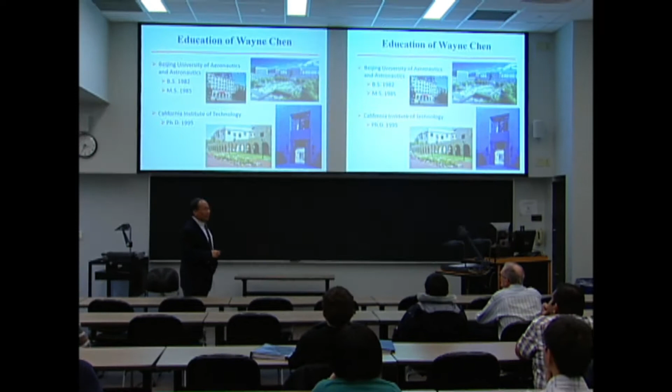All my degrees are in aeronautics. Earlier, over 30 years ago, I got my bachelor's from Beihang University. It used to look like this, and nowadays it looks like this. This is where I got my undergrad degree, and I'm actually running lab classes next semester here. When I was doing my undergrad 35 years ago there, the lab equipment was actually more than we have here now—kind of an interesting contrast.

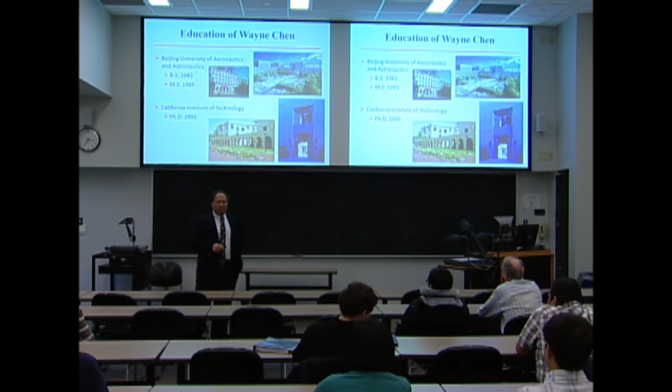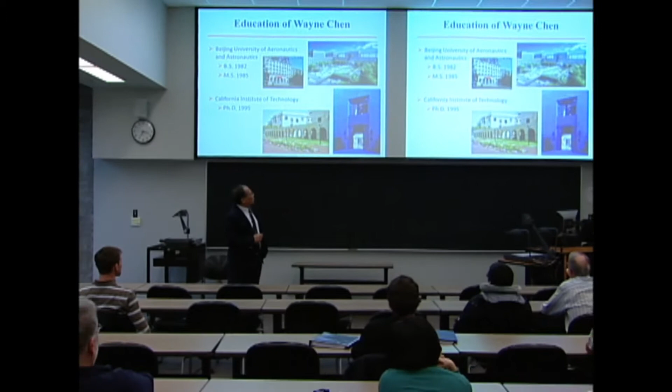Then I went to get my PhD. Of course, Caltech is nothing changed—it's the same old Caltech. And if you talk about equipment, what equipment? If you need something, you build your own. That's where I got my last degree, in '95. When I got into Beihang, that was the top ranking aero university in China, and I think it still is today. When I got my PhD, Caltech's aeronautics was the #1 ranked program in the country, and I think it's back to that spot now.

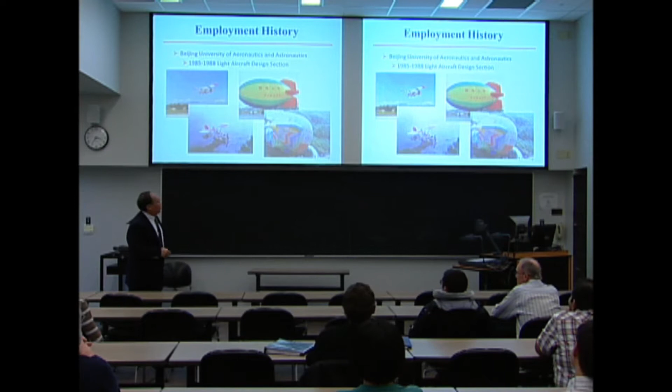Well, there was a gap—I don't think I'm that dumb, but it took me 10 years to get my PhD. I took some time off to have some fun. I spent 3 years designing small aircraft, building them, and flying them. I got pretty good at building these airships—pretty good at tailoring too. If you have a sewing machine, you sew 2 pieces of cloth for 100 feet long, and if you don't do it carefully, by the end one piece can be 5 feet longer than the other.

We used this vehicle basically to pull the electrical line from the first ever Yangtze River Dam to the area the electricity needed to go to, through very tortuous mountains—we got lines through by air. So we did some real work.

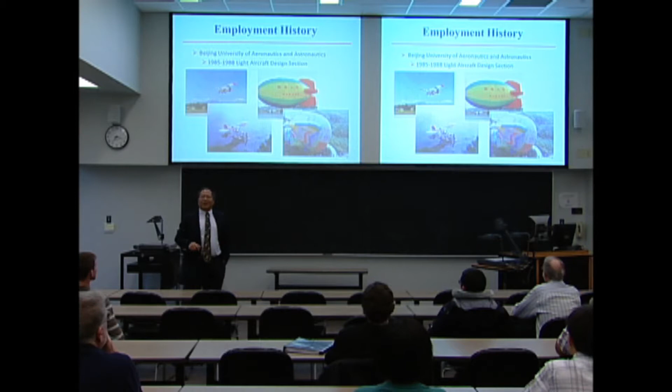But after a while I thought, well, these are too small—airplanes I built were just a bit bigger than model airplanes. I wanted to build something bigger. So that's my next phase.

I was part of a jumbo jet airplane design team of 7,000 engineers. It turned out not to be as much fun as I expected—you get confined to a very small area. But I was by the runway when this airplane took off for the first time, and it was a very exciting, satisfying moment as an aerospace engineer. But after that, it started getting boring.

So I asked to transfer to the R&D department—they said, you're just a production line engineer.

You probably need to show an advanced degree from this country. I said, okay, I'm still young, I'll show you one. So that's when I got back to grad school and got my PhD from Caltech.

The problem is, while I was at Caltech, the company became Boeing, and the R&D department is just completely gone. It's just a department in Cal State Long Beach now. So now I cannot do that.

Then you go teach. So I got a job at the University of Arizona. This is where I started my teaching career. It's a spectacular place, very beautiful. So I figured I'll be retiring there. But then obviously I'm here, I'll tell you why.

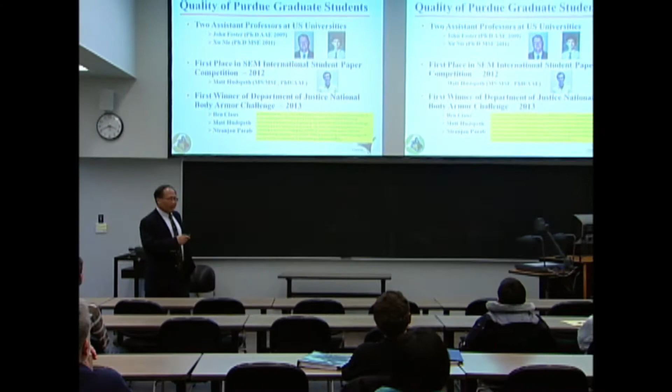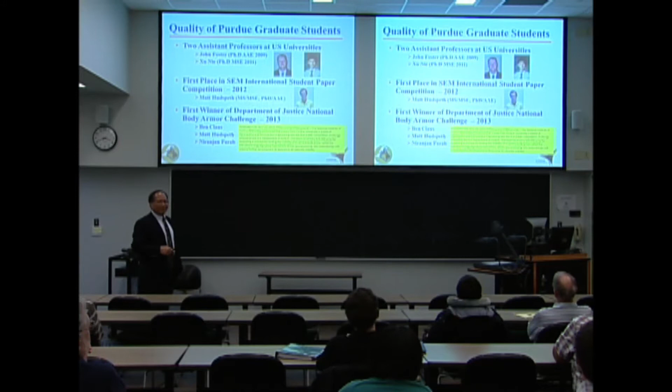So this is my first batch of students. I came here in January 2005. There are two assistant professors here, one's actually visiting me right now.

Yeah, I think this guy has trouble spending his money. He's been an assistant professor for 2 years and got over $2 million, so he's now bumping his head on the wall.

And the next younger ones are growing up. This one got first place in the international student paper competition last year in an SEM competition.

And this actually just made national news a few days ago. The National Department of Justice called for a national challenge on police body armor evaluation, open to everyone—national labs, industry, research institutes. Eventually, my students beat out everyone to win the final contest. That was just announced.

So it is a very satisfying experience when you have an opportunity to work with the hardest working people that are also the brightest—they're very creative.

And of course, second, the factor is we have a group of outstanding colleagues. Almost anything you want, any question about anything in engineering, you can find someone to talk to. And it's easy to work with people. I work with colleagues I've never met, write giant proposals, and get funded.

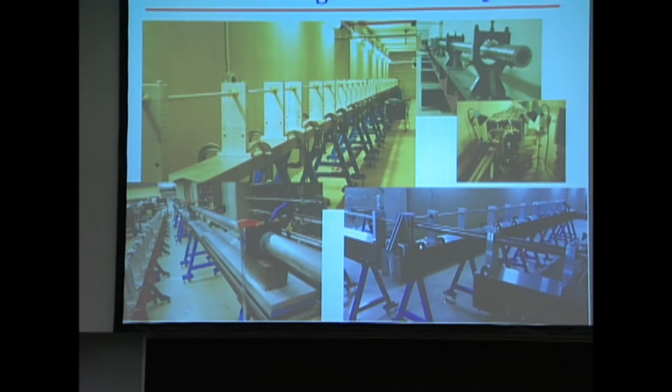Another main issue that I left Arizona is I pretty much grew out of capacity, my lab was way overcrowded. At that time, Purdue was expanding their lab spaces. This is the basement of Bowen Lab, and it's a perfect place. You can make big noise without getting noticed, so you can build big guns and actually play down there.

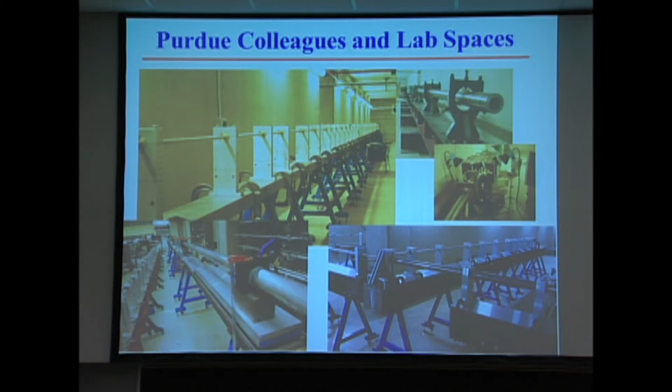I actually told my students in undergrad class, when I was teaching structural analysis, your professor, when he's this tall, he likes two things, guns and airplanes. So as a little boy, what would you expect? Now the professor's over 50 years old, I'm teaching you guys airplane design, and playing with bigger and bigger guns. Look at the size, a rifle looks like a toy inside there.

So it's a lot more fun and you get paid. It's a career that you really cannot complain about. It's so nice.

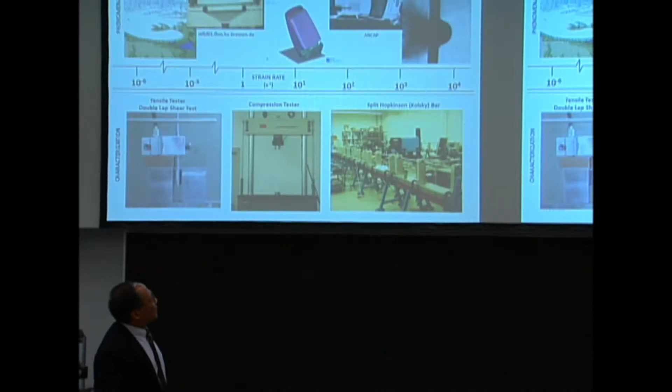So what do we do with all these tools? I have good toys with smart people. Now we need to do some scientific work. The area I'm working in, this is an axis that tells you how fast things are deforming. Most of the properties you find from books are in this region.

Once material deforms faster at a higher rate, you don't get the properties in the books. So that's actually my lifeline. We characterize impact response of materials at high rates.

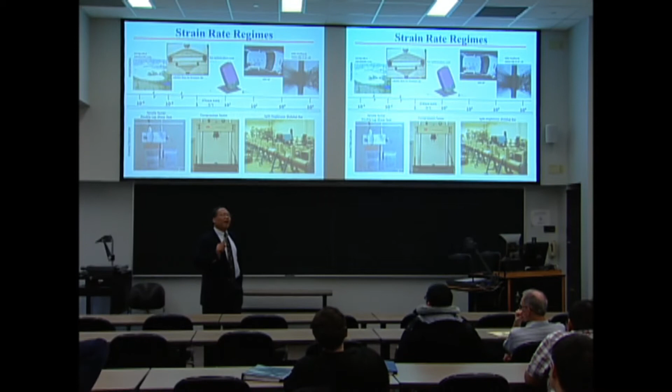Sometimes we do obvious impact, sometimes it's not that obvious, like a cell phone drop. I once characterized the shock isolating material for a cell phone company, and that was over 10 or 15 years ago probably. Later I noticed the cell phone company made their advertisement: other people's cell phone dropped on a concrete floor, the cell phone shatters. Their cell phone dropped on the concrete floor, the concrete shatters. I know what that capacity is.

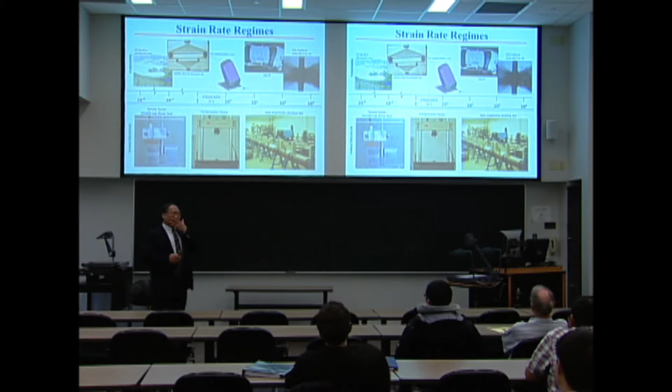So this is the area I basically work in, with people with applications in impact situations, ballistic impact, or crash or drop situations.

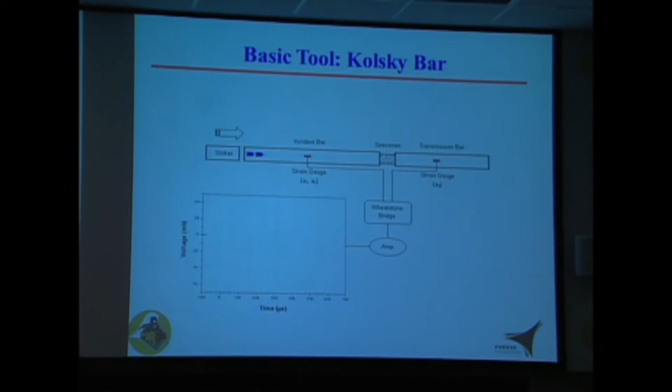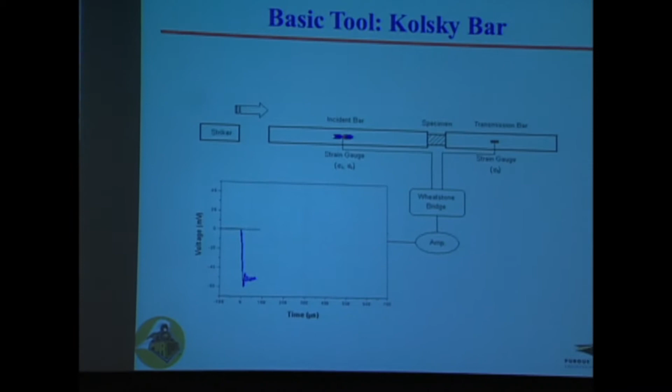How do we work on this? This is my basic tool. I want to deform the specimen, a sample, at least at hammer blowing rates. You can break a piece of material just with a hammer, you put it on the table, you break it, it's not a big issue. The issue is we're a scientific lab, we need to make things quantitative. So how do you make things quantitative?

What we do is we put an elastic rod in front of the sample and an elastic rod behind the sample, so the hammer will hit the sample through the rod. You generate elastic stress waves that load the sample. Some of the wave will reflect back, some of the wave will go through.

This is the same phenomena as if you stand by a pond and throw a piece of rock in the pond, there will be a wave propagating to your feet. If you throw a bigger piece of rock, the wave is higher. So the wave carries the information about some event occurring from a distance.

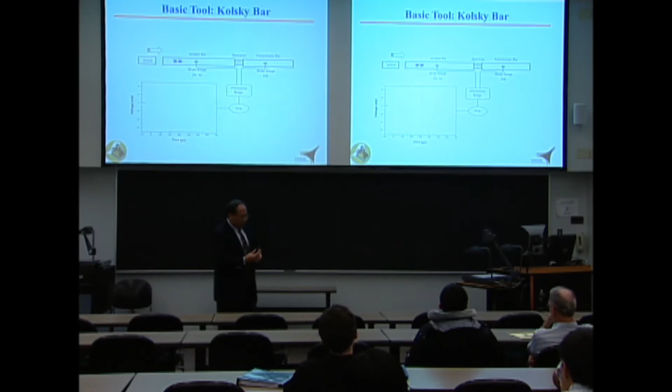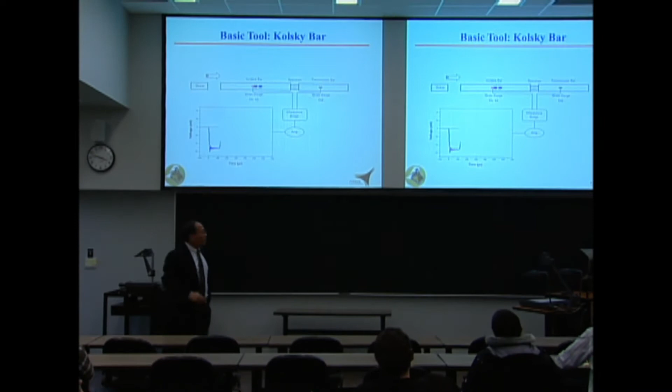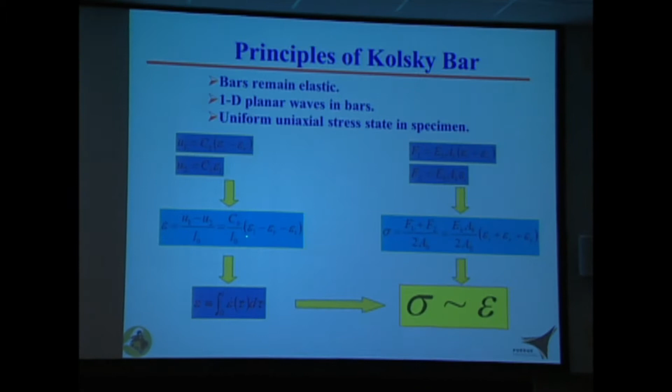This is actually a class I teach at the graduate level, how you analyze these waves using this phenomena. By these tools, now we can make things quantitative. I can measure the strains on the surface of the rod associated with the wave coming in, called incident, reflected back, called reflected waves, and transmitted, the wave that goes to the other side. With these three pieces of information I measure in the lab, I can find the stress-strain curve of the sample I'm hitting. So now it's still hammer blowing rates, but I get quantitative information out.

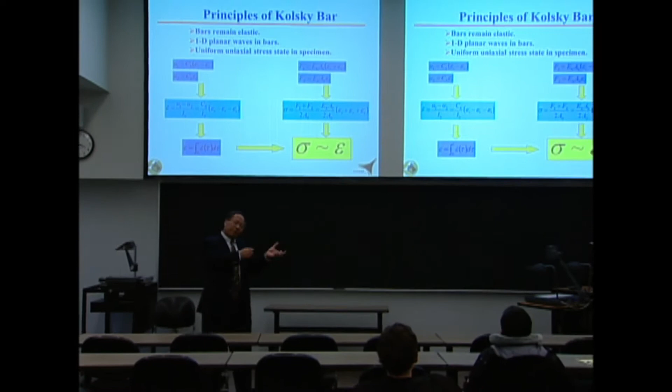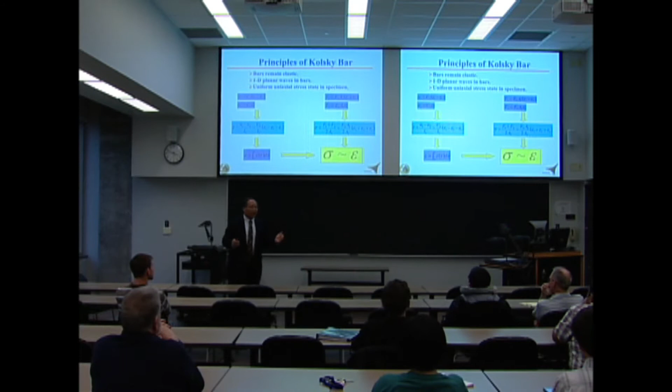So you hit it different ways, you get a family of these curves that numerical people can use to embed as models into their codes to simulate structure response. That's pretty much the path where we fit in.

With that principle, we have quite a few different bars, and in the lab they look very different. This is a very small one - we actually used to pull 3 micrometer diameter spider silk, trying to see how that breaks.

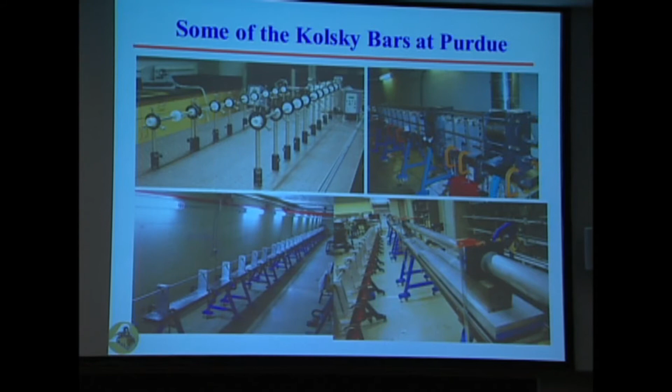There's a lot of things you can learn from spiders, they've been around for 400 million years. This was actually a paper where my student got first place in the student paper competition.

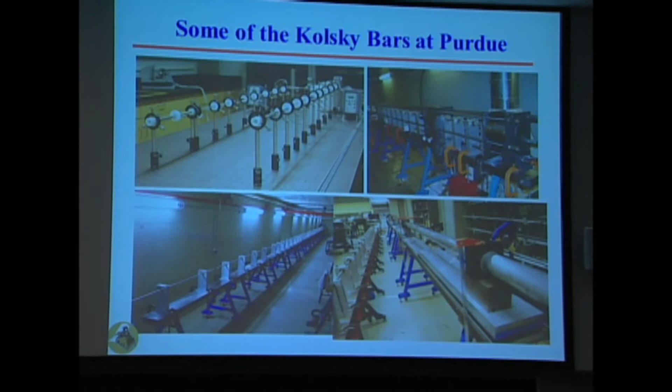We also have bigger ones that we use to characterize high strength concrete - if you want to make a building blast resistant, we characterize those materials. We have a bar that can apply pressure on the sample equivalent to 10 miles underground, a very high pressure, and then you can do axial impact. Or you can have a very long bar - this is probably the longest in this country, at least.

The issue with these devices is that everybody understands the principles, but there's no standard that guides how to conduct these experiments, because these are not trivial experiments. That's where I spent my first 15 years or so of my career, trying to ensure that this material deformed under the conditions we wanted, and that we could explain it clearly.

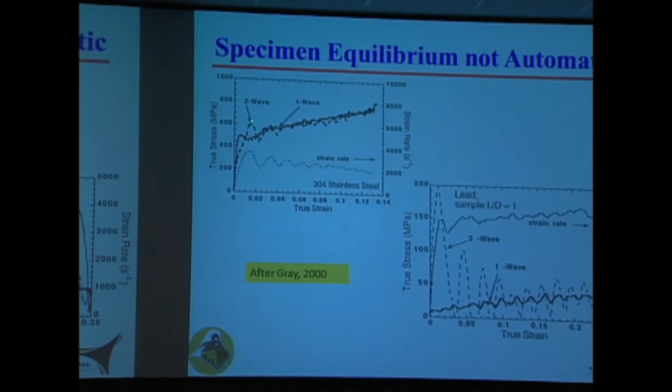Here's an example. I was measuring stress strain curves. If I have a piece of stainless steel, you plot basically the load deformation history. My sample has two ends. Once the front gets hit, the back end transmits load out. If I measure the force from the front end versus the back end - called 2-wave and 1-wave - you see they reasonably overlap each other. So the load in the sample is reasonably evenly distributed, front end and back end very similar.

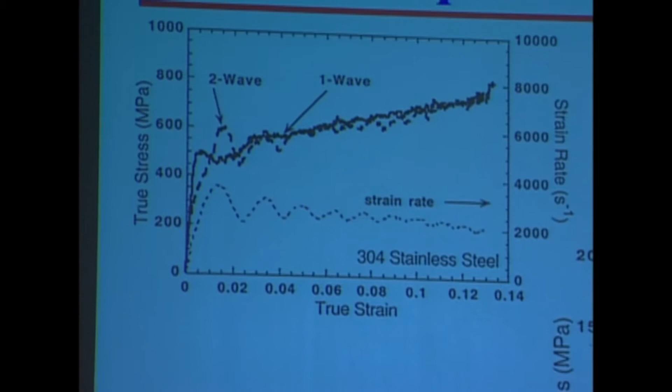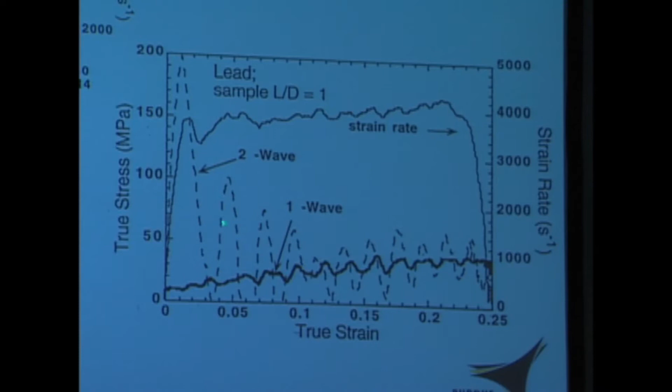If I change the sample into lead, still metal, this would be the curve from the back end load history, the dark one, and this would be the stress strain curve from the front end load history. Now we're going to run into problems - how are you going to explain this to your sponsor, that the two ends are so different? This isn't as challenging because lead is still much harder than the material I'll show you later. With much, much softer material, things get much more challenging.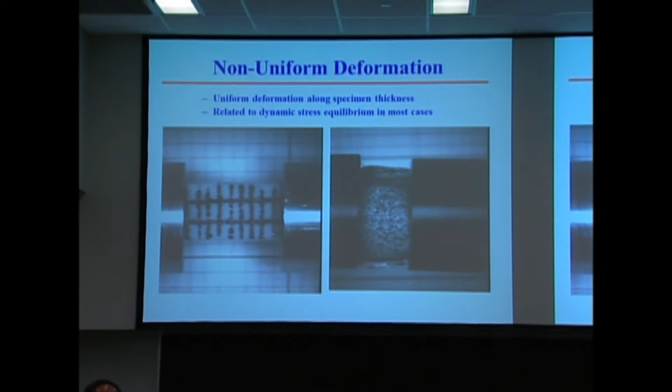So I'm measuring stress strain curves. The stress may be wrong if your sample is not as hard. And if you look at strain, if a sample is soft, do I talk about strain here or here? They're quite different. So for soft materials, if we don't pay enough attention to what we're doing, you mess up the load measurement, mess up the deformation measurement, and you don't get anything valid.

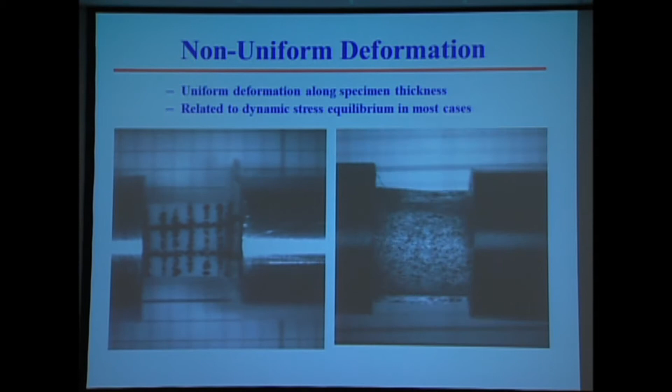So what do you do? You need to look back at the tools we have. We have two skinny rods that sandwich the sample. These rods are much less stiff compared to your static material testing machine, so the sample's response to loading is an integral part of the experimental design. In a static machine, you set it, put in rubber or glass, and the machine runs the same way - it has its own closed loop control system. In the high rate impact machine, you hit the same way, but if you hit a piece of rubber versus a piece of glass, you don't expect the sample to deform the same way. So the experiment needs to be designed very carefully.

You have to control the way you hit it. I don't have many things to control, it's only two rods, so it's about how you hit it. You have to push the material, initially at rest - this is common for all dynamic experiments. The sample is initially at rest, then you want to deform it at high rate, so you have an acceleration process. The whole trick is how do you control the acceleration? You push the material in a way that it gets high speed deformation before any failure occurs.

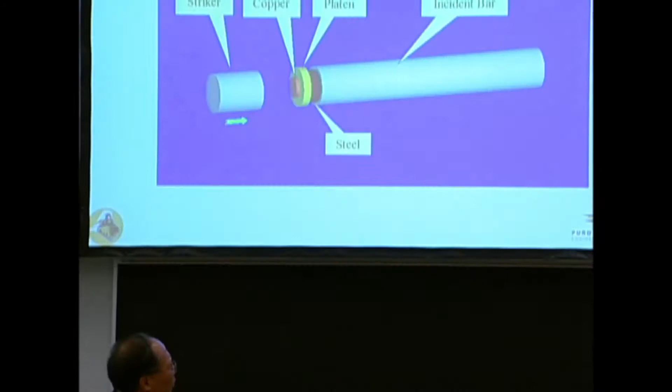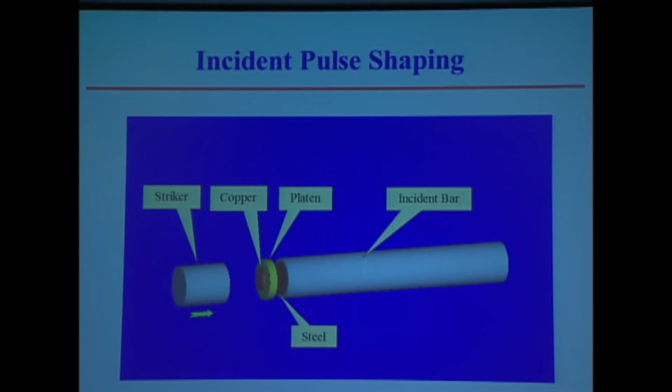So what we do is called pulse shaping. We put - this is the hammer, and this is the rod in front of the sample - instead of direct impact, where all the momentum from the rod transmits into the incident bar, we put some momentum faucet, little deformable materials, so not all the momentum gets in there. You control the way it gets in, controlling how you hit the sample.

Of course, you need to get things quantitative, but that's a lot of work for graduate students. So you figure this out and make it into the program. We can show that we can predict what the real response would be. So I can work out how to load the sample and make the pulse shaper in the computer before sending it to the machine shop - which would otherwise make you wait two months for any piece. This is a very effective tool.

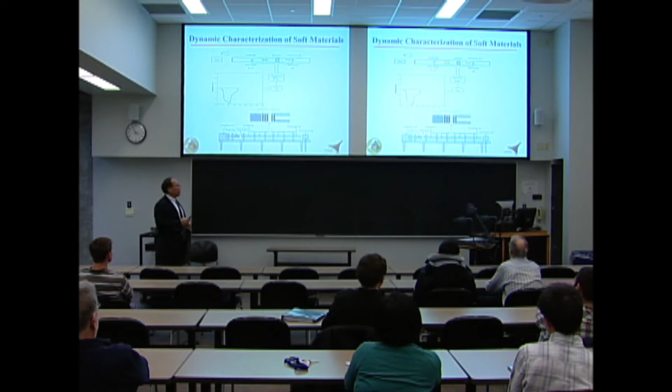Once we have this quantitatively set up, we can do the experiment. The impact loading history will be very different, but that would take an expert in impact mechanics to understand why this is very good. We also verify whether the two sides of the sample have the same loading history, and we have a high-speed camera to show that the samples indeed deform uniformly. So this is one example.

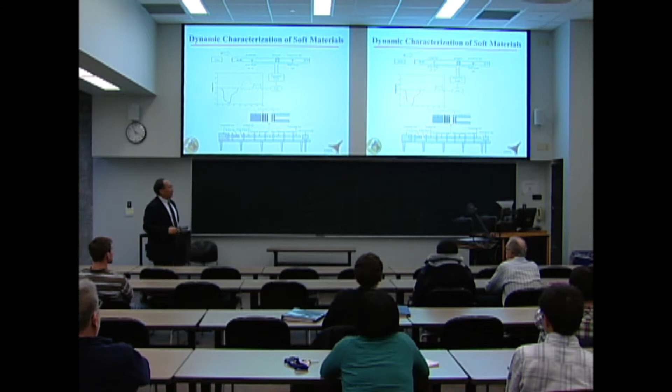If you have a soft sample, you need to take a series of measures to make sure you obtain a valid result. On the other hand, if a sample is brittle, you have other problems - the sample breaks very early. So you need to develop many other techniques.

For the soft part, we applied the techniques we developed and actually worked on the soldier protection program. If you design body armor and use a computer to evaluate the effectiveness of armor, you need to know the material behind the armor, how it responds to impact. So it's everything you can do - from muscles to lungs, liver, kidney, skin. We did lots of these, including tendon.

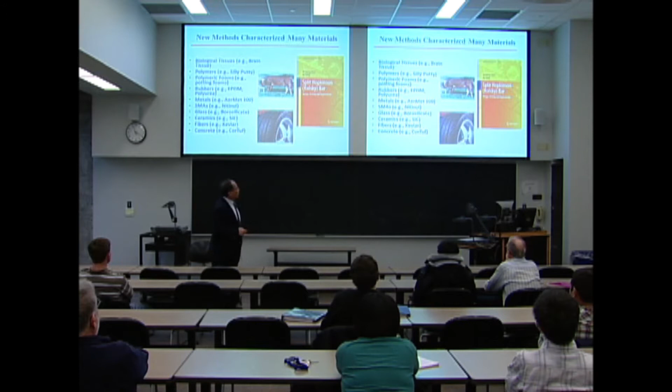And even more challenging, this is for the traumatic brain injury issue. So we characterize the brain tissues, and we did a lot more. As I mentioned, this is a summary of more than the past 7 years.

So we did quite a bit more, and we also become fairly well known in the field. I actually taught a short course at the society annual meeting, showing people how to do experiments on different materials. Then we got a lot of questions: how do you do this?

Eventually, we published a book summarizing the different methodologies we use to characterize different materials. And this is still the only book in the field. If you go to an impact mechanics lab, there's a good chance you'll find this book there. It's fairly well accepted.

So this effort is still moving on. We have different requests to characterize very challenging materials. But on the other side, my interest is getting into a different area. I'm also a materials professor, right?

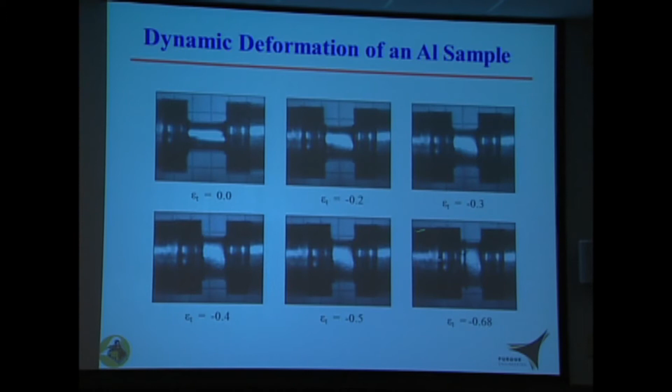I was requested by a group that does very high deformation analysis. They want the sample to deform to very high strain without barreling. So you see this sample starts with a flat surface, and even at very, very high strains the edge remains straight — it never barrels. This is actually a nice piece of work, but this is what we want to learn from the surface.

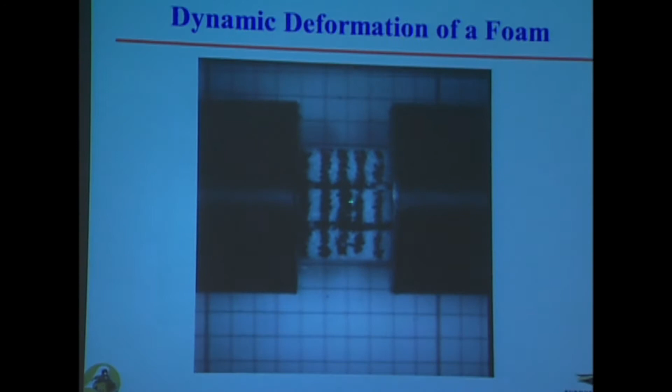But in some other situations, you want to see what's inside. This is a foam experiment, and you see dust comes out, and you want to see what actually happened inside. This is a tank armor ceramic — probably the third hardest material in the world behind diamond.

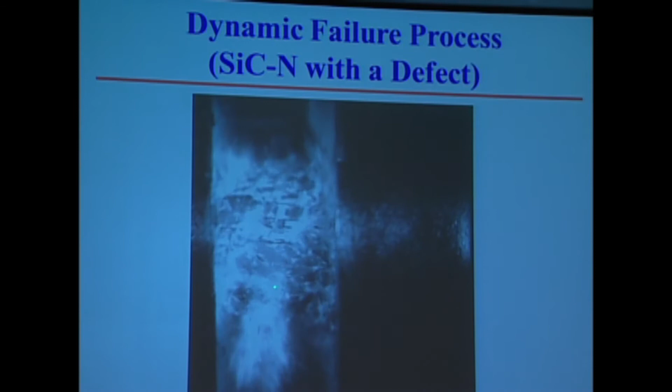You put it on the surface of a tank to resist ballistic impact. Of course, we can use a high-speed camera to look at how this thing disintegrates. But where did the damage initiate? If it's initiated from inside or on the back side, how do I see it?

So this is a new challenge we've been dealing with more recently. Looking back again at the limitations of these experiments we've been conducting over the last 15 years — we measure the mechanical properties in the average sense, averaged over the sample volume. If there's a local deformation inside the sample, the technique is not sensitive to it. Also, if the sample is opaque, you cannot see the damage process inside.

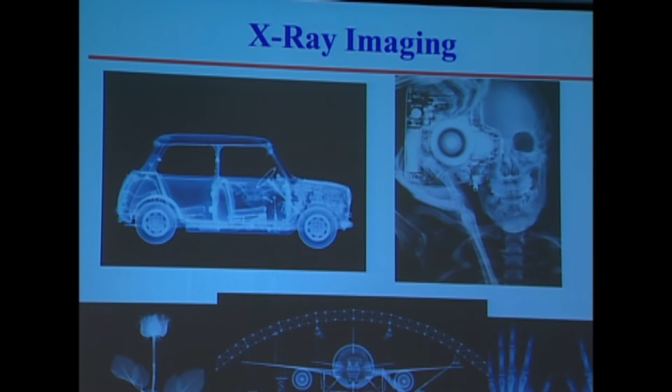So how do you see through things that are opaque? X-ray. So we were trying to use X-ray. Now, of course, this isn't going to be dental X-ray strength, because the phenomena is fast — I need a high-speed camera to record the failure process. So if your dentist takes a few seconds to take an X-ray of your tooth, in that same time I will run a few thousand experiments.

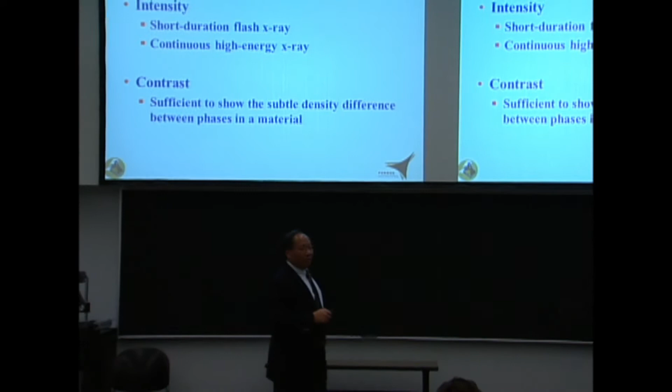So my X-ray needs to be much stronger. There are two ways to make X-ray very strong. One is flash X-ray — a nanosecond, very strong X-ray, but that's only one flash. If you want a continuous high-speed image with X-rays, you need a very strong continuous X-ray source.

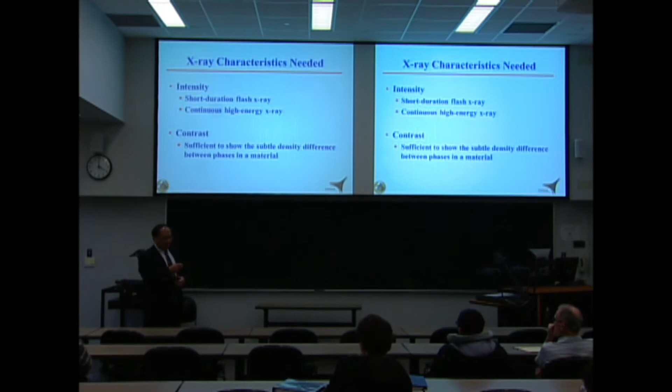The second part is that when you deal with materials, X-ray typically gives you a radiogram. If you have a hand, you see the bones clearly — the rest is just cloud, you don't really see much. But that's because the density of the bone versus the rest of the tissue is drastically different. If you have a material, even with two phases inside, the density difference is not that much, so you need to find ways to increase the contrast. So these are the two issues we need to overcome: the intensity and the contrast.

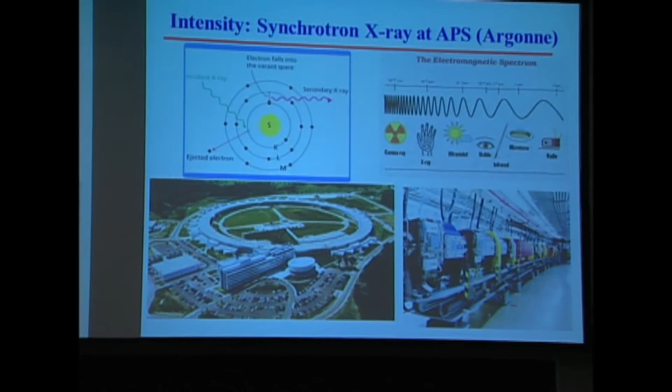So how do we overcome the intensity? This is the lab that we're actually running — luckily it's only about a 2.5 hour drive from here, in Argonne, outside Chicago. The electrons running inside the storage ring can be extracted out, and you force the electrons into zigzag motions called an undulator. Every time they're forced to turn, they shoot out X-ray. You collect the X-ray and characterize the sample.

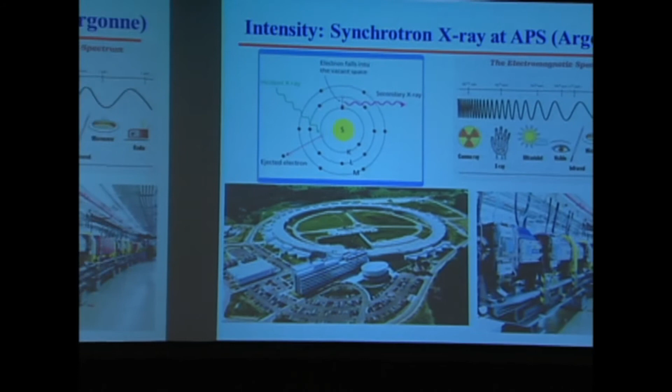For the increase in contrast, we don't really put our image plane right next to the sample like you have in your dentist office. We take images away from the sample, giving it some distance. So if X-ray goes through two phases of the material, as they propagate, the phases interfere with each other. After distance, you see a little bit of thickness of the interface that initially had zero thickness. And that's how you increase the contrast.

I'll show you an example where we can see mechanisms inside very soft tissues that typically you can only see as a cloud in a medical radiograph. So that's the idea. Then you need some smart people because there's a lot of coordination you need to do.

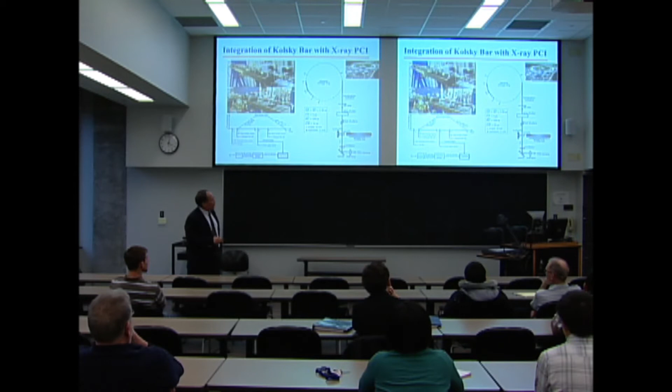This is my loading bar. This is a sample, there's a load cell behind it. You need to make sure that X-ray comes while the sample is being stress wave loaded. X-ray is so strong you cannot allow it to come early, otherwise it burns up your sample. And you have to shut it off right after loading, otherwise it burns everything along its path. So you need to have coordination with all the shutters.

When X-ray passes through the sample, you cannot really manipulate it with X-ray much, except pure single crystal silicon. So we actually converted the X-ray into visible light with a scintillator, so you can manipulate it, reflect it, magnify it, and record it with a high-speed camera. This high-speed camera also needs to be phase-locked with the electron bunches coming from the ring. So that's another level of synchronization.

With a group of very smart students, we constructed all this, from the concept that we wanted to do these experiments to actually working in the lab at Argonne National Lab, in 3 months. So everything's constructed, remotely controlled, and passed the Argonne safety inspection. So then we can do something fun, use the tool to do science.

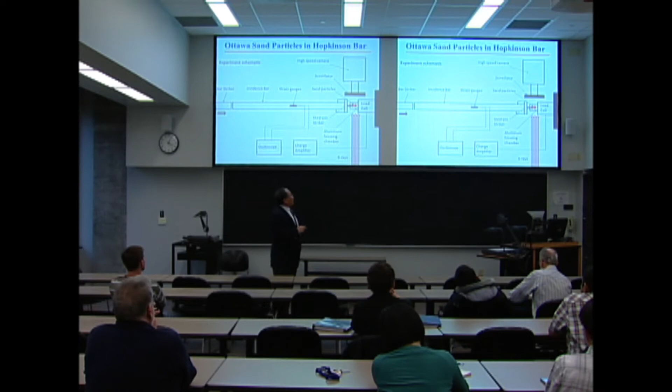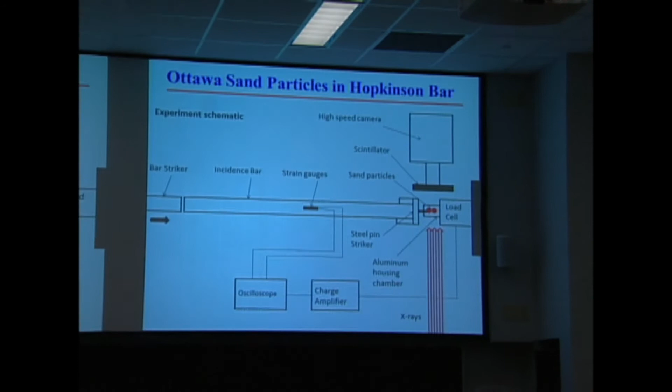I'll give you a few examples of the science that we do there. In this one, we put 2 sand grains next to each other and use the bar to impact the grains and look at how the grain breaks. That's a very fundamental mechanics issue.

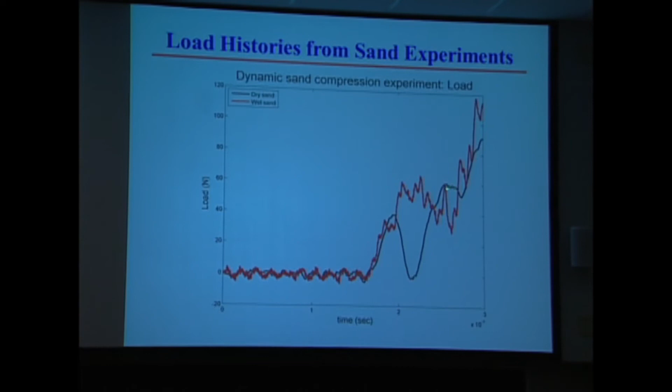We can measure the loading history: as the grain breaks, the first one breaks, then reloads back, and the second one breaks at a higher load. If you fill the tube with water, the loading history is a little different, but I'm not going to talk about this wet issue. We're going to show you the dry grain results.

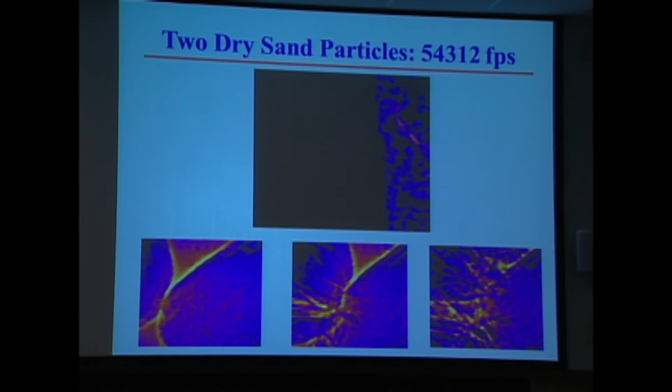Here, 2 sand grains get pushed horizontally, and you're going to see surface damage. This image is shown just through the thickness. On the surface, you see the initial surface damage, and one side developed damage much faster. Eventually that side explodes, but the other side, the damage stops. So if 2 sand grains are against each other, when they fail, one will explode and the other will survive.

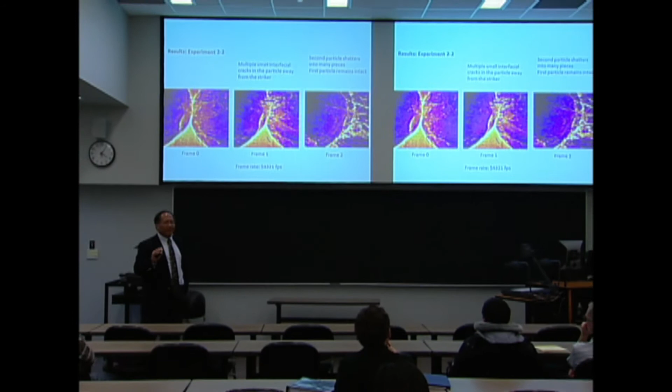We did quite a lot of these. In the previous one, the left grain exploded; in this one, the right grain exploded. So there's no other failure mode, like a grain splitting into 2 halves. It's always explode. Once it explodes, it's unloaded, and the next one will survive.

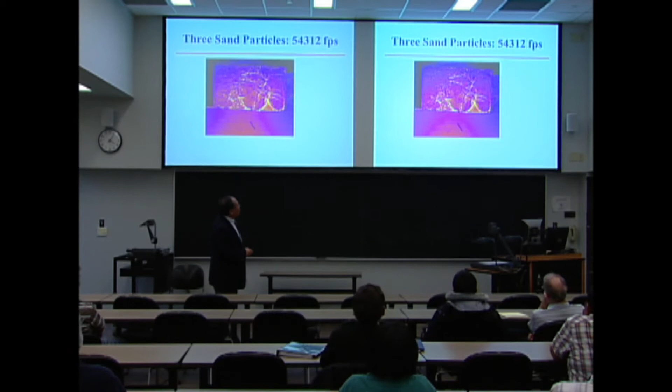How about 3 grains? You'll see this one explode, then this one. The middle one actually survived, you can see it's still there. So you can do a lot of modeling to simulate how this happens, but this is very interesting science.

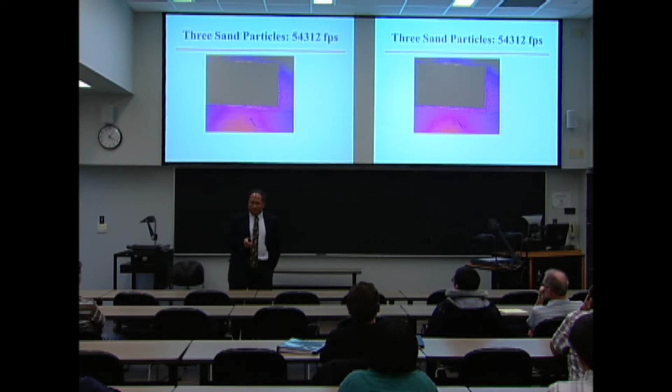But what's the big deal, where's the applications? I'll show you one application: why people use sandbags to stop bullets and blasts. If you think about how each grain fails in the granular material, load transmits through the granular material through a specific chain of loading.

Some of the grains never get loaded; they always pick the strongest resistance path to go through. So the experiments show that if one grain is going to fail, it will explode, it will disappear. So you're missing one link in one of the chains. Then it takes time for the chain to readjust and find the neighboring load path. That means a very high, strong shock can only propagate inside the sandbags near particle wave speed, near particle velocity, never as a shock wave velocity.

So that's how sandbags isolate shocks. So the two-particle science, you think back, that's actually answered it. Everybody has been using sandbags, you know how that works. That's a very good scientific explanation.

And of course, there are others. We proposed a new concept to ARPA-E to make impact-safe battery packs for cars. Right now, batteries in cars are protected like a baby, but we propose that's not where you need protection. The battery is only part of the structure - what you need to protect is the people inside. So make the batteries like gravel, put them in front and back of the cars, let them take the hit, and you'll protect the people inside and cut the weight down. For that concept we were just awarded $500,000 for next year, and hopefully we'll continue on that.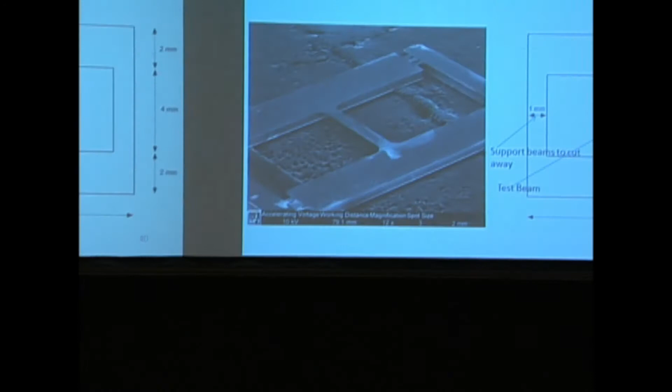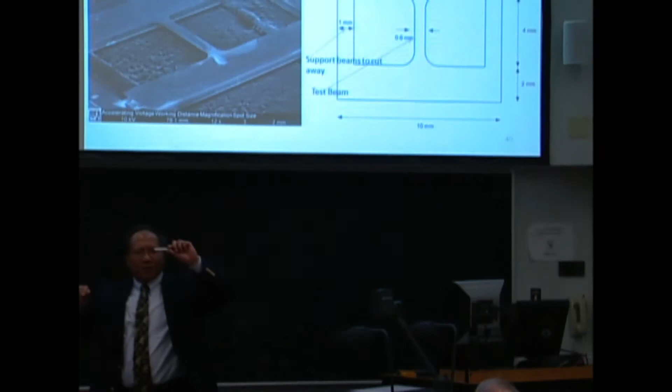This is another science issue we haven't understood. This is a very brittle material - we have a tensile sample of single crystal silicon, but it's very thin. So if you have brittle materials and you want to break them in tension, how many pieces would you expect it to break into?

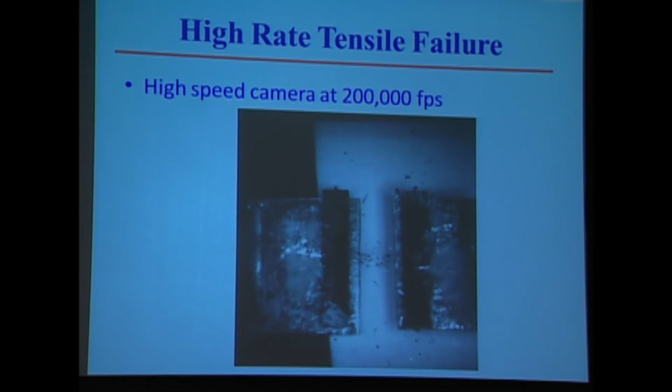Two, maybe three, right? That's the common sense answer. Think how many pieces this thing's going to break into. It's a brittle material, and this is just holding it in place - I'm going to pull it. This is on a high-speed camera. So I asked the student to bring me the fracture surfaces to look at, and the student said there's no fracture surface. I said, no, what are you talking about? I spent a lot of money to make these samples, I need to look at the fracture surface.

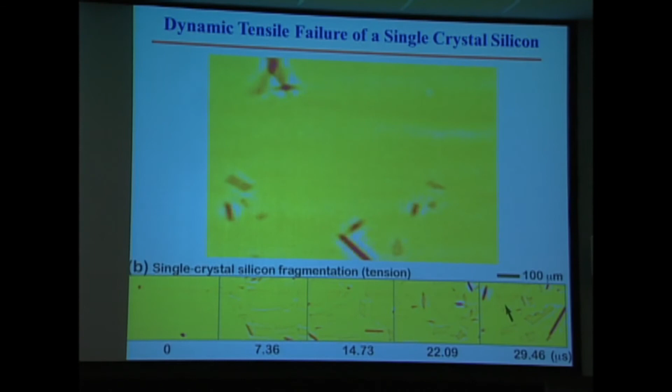So we brought this in on the X-ray to see much higher resolution. But still, from a mechanics point of view, we still don't know how to explain this - under a brittle material, under very simple loading in tension, why does it explode into so many pieces? And it's repeatable - you take the whole thing to the X-ray lab and it still explodes, becoming very, very small pieces.

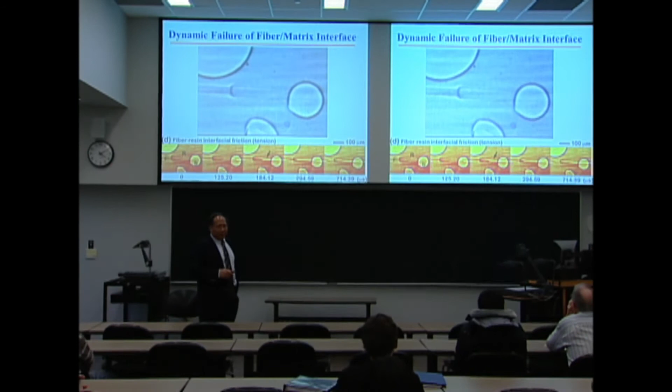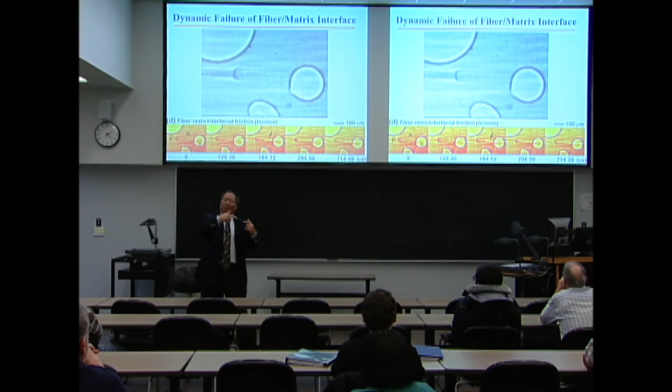This is an interesting experiment - we're pulling out a fiber. This is a 12-micron Kevlar fiber from the epoxy base. If you're in the composite field, many people look at how much force it takes to pull one fiber out of the composite material, but nobody has ever seen the interface, how the fiber actually gets pulled out from the matrix material. This is the first time you can see how the interface forms.

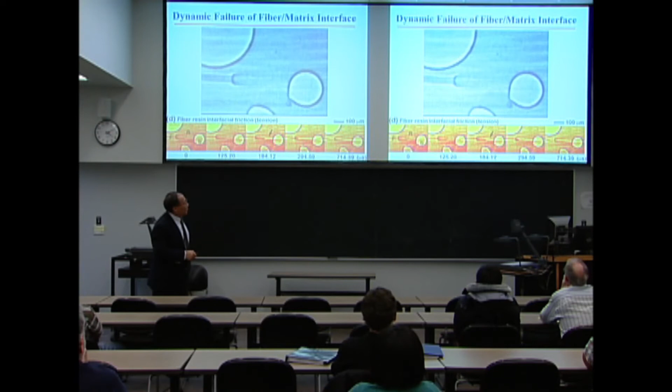You can actually increase the contrast of the images, and we have the loading histories, so there's quite a bit of analysis you can do behind this. This is the example I'm going to show you of the power of this phase contrast imaging X-ray technique.

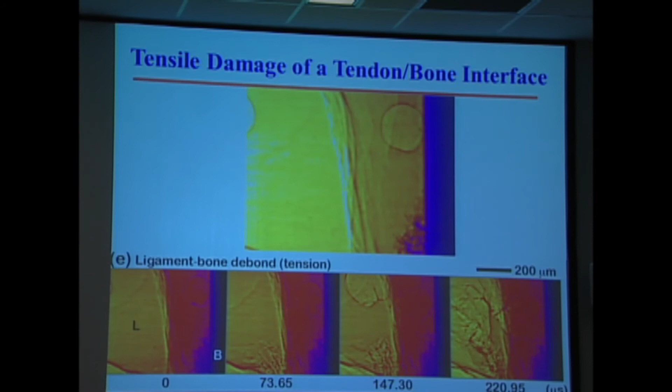The only problem is we don't know how to explain what we saw. So we have this new experimental technique and we see quite a few things from different angles that no one has ever seen before - you see the tendon getting pulled off the bone, and the damage formation process inside the tendon at high speed. I'm still looking for people to collaborate with to explain how that happens. We have different results on old tendons versus young tendons.

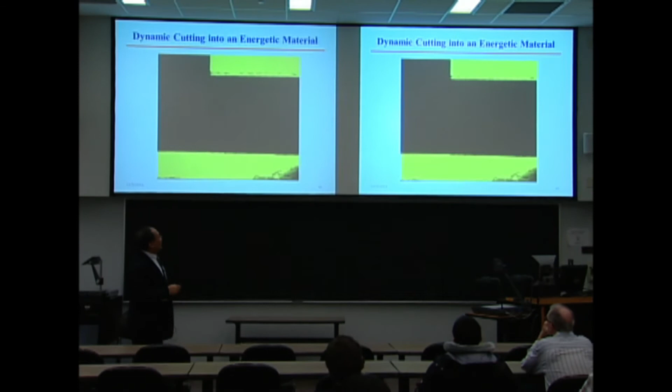Recently, one of the college's preeminent faculty teams, we're going to work on explosive materials, energetic materials - this is about safety for energetic materials. We have simulants of energetic materials that get punched into by a sharp object, and we can characterize the deformation field around the punch. That's one effort we're starting, building toward characterizing the high rate response of energetic materials.

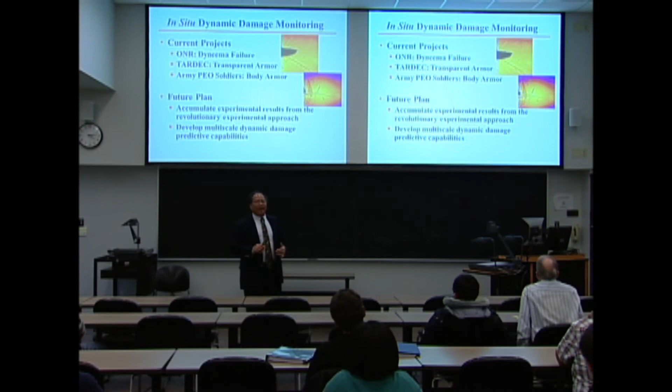All right, so that's the more recent fun we've been having. We're using this X-ray to see anything inside that's breaking up. Some of it we can explain, but quite a lot of it we cannot explain because this is a very different angle. So what's the future?

We plan, one thing, to further develop this in-situ damage monitoring technique so we can look at more materials. Currently I have three projects in this area supported to work towards understanding the failure behavior of different things, so we're going to accumulate more experimental results. We put different materials into the X-ray and we can see much more from it. Then we can develop damage models at different scales - we can focus in a very small area, like the fiber getting pulled out, or in a bigger area where you have to see the grain interactions inside an energetic material, for example.

The second area we're going to focus more on is energetic materials, aligned with the formation of this preeminent college faculty team. We currently have 2 programs. One just kicked off today, sponsored by Air Force Research Lab—Dr. Martin here is a sponsor, actually, and we had a kickoff meeting this morning. Then I have another program as a portion of a Center for Shockwave Processing of Advanced Reactive Materials.

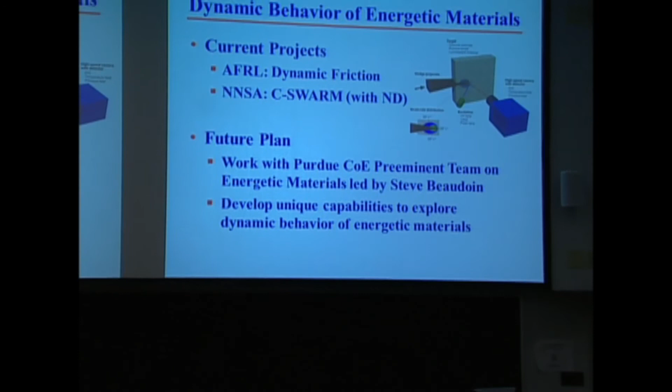This is a collaboration with Notre Dame that Steve Son and I were members of. We will be funded for at least the next 5 years to look into how shockwaves interact with energetic materials, to further develop capabilities to explore the dynamic behavior of energetic materials. As feedback from the Air Force, that's a fairly fundable area and should be interesting—it's less explored.

Then the last area—there's a lot of outstanding problems in penetration behavior. My first research sponsor was a top expert in penetration mechanics, and eventually I was gradually influenced, so I'm looking more into penetration issues. We have a few programs now funded to predict the ballistic limit and look at the penetration behavior—one aspect we worked on a project a few years ago, supported by

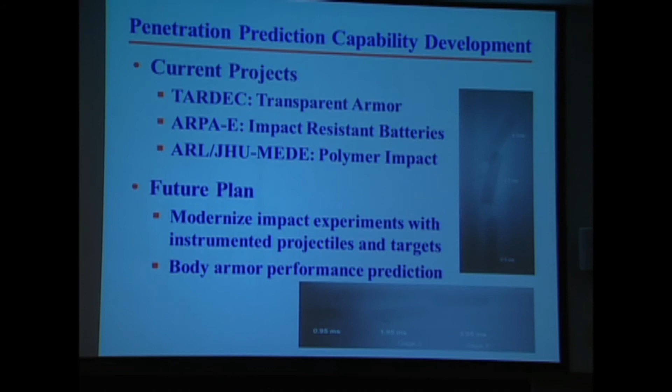DTRA, the Defense Threat Reduction Agency. We spent a couple million dollars to develop instrumentation that we can embed inside the targets, so we can modernize ballistic impact experiments with much more output from one experiment. We can put sensors in very different places to understand the event much better, and of course now with X-ray. So that's one area I plan to develop, and would seek funding in those areas when I have an opportunity.

So now to summarize—this is more than 7 years ago. I've been very fortunate to have a first-class education all along my life, to work with very smart people and hardworking students, and to have sponsors that let me play in this narrow area continuously. I've been on this topic nonstop over the last 25 years, actually since I started as a graduate student, and we're still working in this area and I'm still fairly well funded. So I always consider myself a very fortunate person, very lucky in that position.

In the early stages, we developed techniques to make sure we characterize the impact response of materials properly, and we summarized most of the work in the form of a book. Recently we opened up basically a new channel—even when we repeat the historical dynamic experiments, now we can see what's happening inside, which produces a lot more insight into physical modeling of those events.

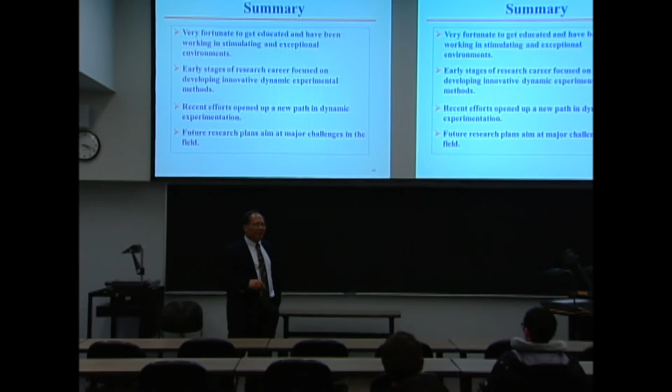In the future, I'm still aiming at major challenges in the field. You also always need to keep a few problems in your mind that would keep you thinking—sometimes you even forget eating. That must be there. So I don't know if I can solve them, but these are the things on my mind. I want to do it.

So that's the last slide. Actually, my materials department head is not here—I'm a 2/3 aero professor, 1/3 materials professor, so my materials boss told me his logo should be half the size of the aero logo. So thank you very much.